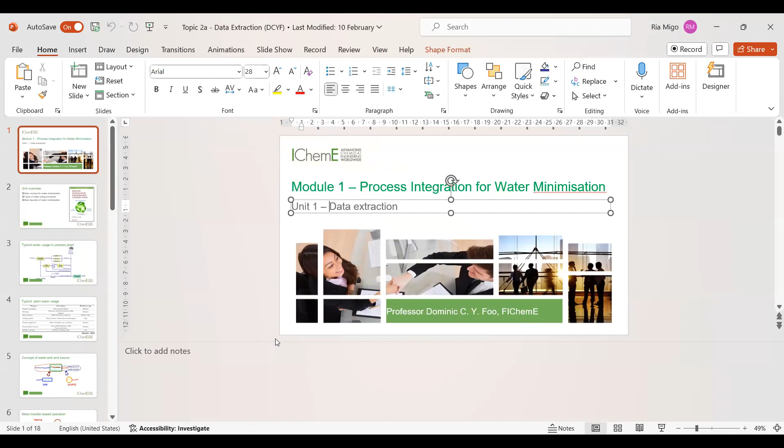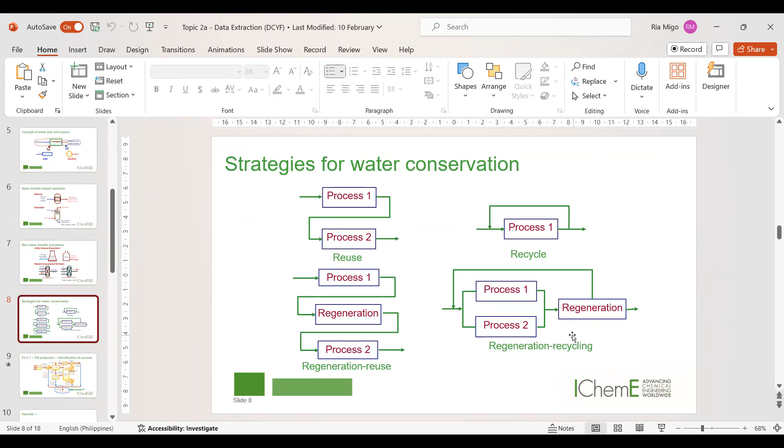Okay. So last week, basically, after the introduction, we discussed the main concept of water minimization, the types of water using processes, main heuristics for water minimization. And we had an example. So by the way, these are strategies for water conservation, di ba? We have two, the reuse and recycle, or regeneration with reuse and regeneration recycle.

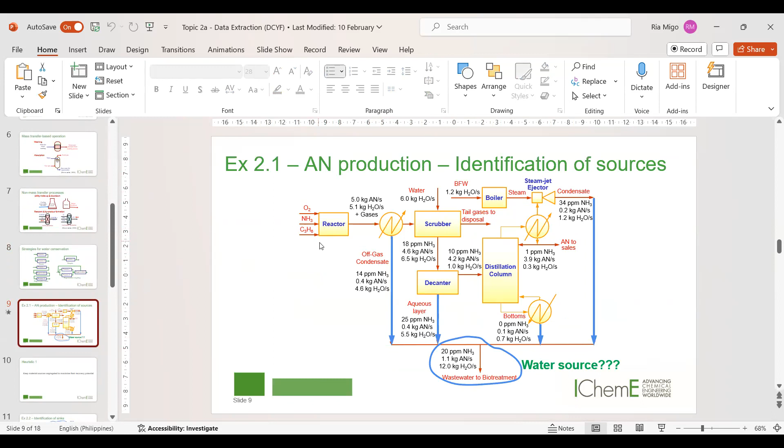And then for this example, we identified the water sources and the water sinks. So remember, ano yung water sources natin? So these vertical lines here. Then the water sinks, the operations that require water, which are the scrubber and the boiler. The water sources discharge wastewater.

So for heuristic 1, remember, heuristic 1 is to keep material sources segregated to maximize their recovery potential. Because some of the sources actually have low impurities. Like, for example, this bottom source, it has 0 ppm. And also, for example, this off-gas condensate has 14 ppm.

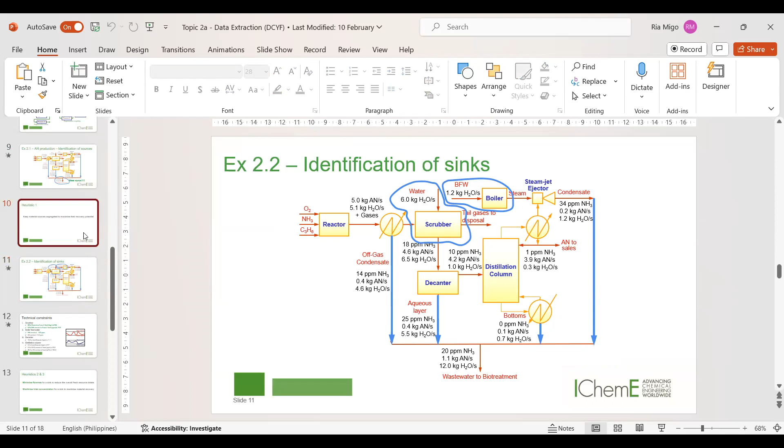But when we mix the sources together, of course, the impurities from the other sources increase the total impurity of the mixture. Yeah. So for heuristic 1, we should segregate the sources to maximize their potential, since we have sources that have lower impurities. Okay, next.

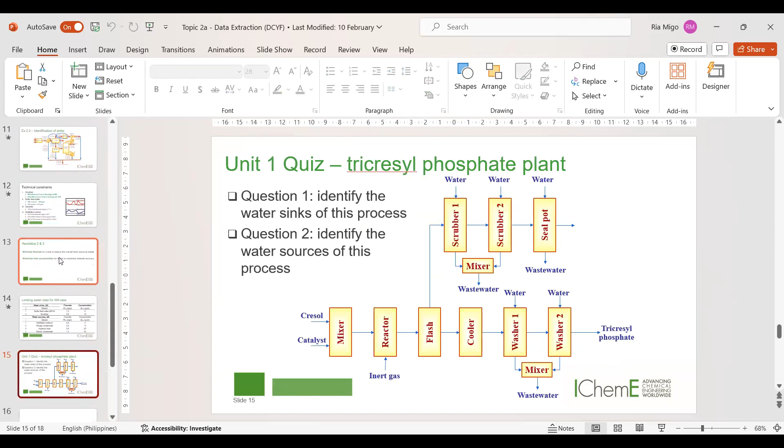Okay, for heuristics 2 and 3, minimize flow rate for a sink to reduce the overall freshwater resource intake. Like for this one, for the scrubber, the flow rate operates between 5.8 to 6.2. So if we operate more than 6.2 kilograms per second, flooding may occur. But instead of operating in the middle, we just choose the smallest, or the minimum flow rate, which is 5.8, to reduce the overall fresh resource intake.

And then the third heuristic is to maximize inlet concentration for a sink to maximize material recovery. Wait lang. Yeah, for a sink, so pareho. So this one, the concentration varies between 0 to 10 ppm. Balikan natin tong slide. For the scrubber, ayan. So 0 to 10 ppm, we choose 10 ppm to maximize the recovery of water.

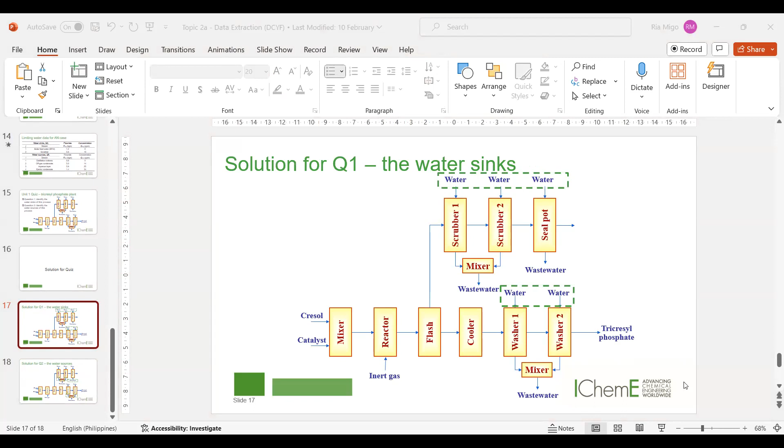Then we had an exercise wherein you identified the water sinks and the water sources. So, not correct mo yung exercise na to last week. So, today, we will go to topic 2B. Hold on, I'll open topic 2B. Okay, can you see the slide now? Unit 2, graphical targeting technique for direct reuse and recycle.

Yes. Okay. Hold on lang, wait. Yes po. Okay. So today we will proceed with graphical targeting technique for direct reuse and recycle. So nagre-record na, 'di ba? Opo. Okay, so

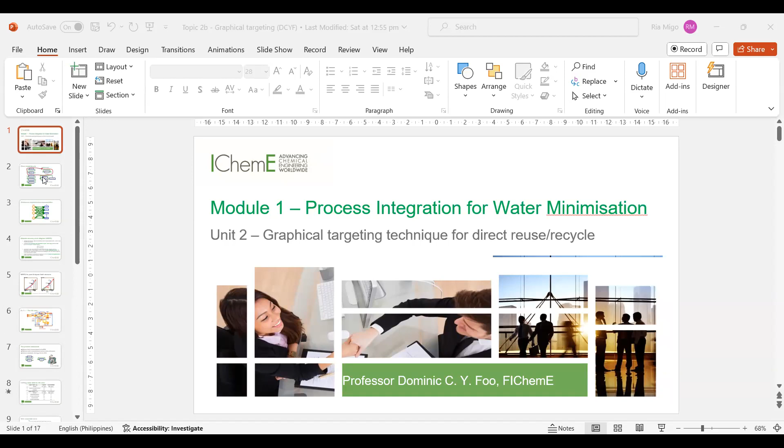when we talk about direct reuse, it means waste from one process is used again in another process. Like what we discussed last time, 'di ba? So waste from process 1 is being reused in process 2. That's reuse. And then for recycle, the waste is rechanneled back to the same process again. And for our discussion, we will focus on these two types of strategies, the direct reuse and

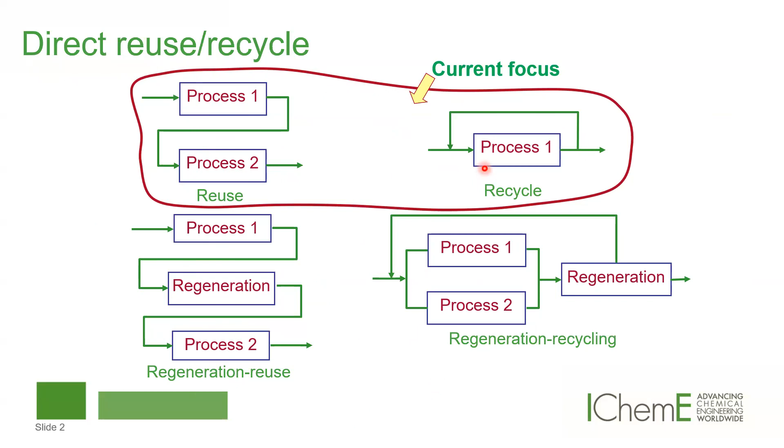recycle. So direct means, unlike this one, there's no regeneration step. This is not the focus of our discussion. So we'll just focus on direct reuse and recycle. Now, we can represent the direct reuse and recycle in a source and sink structure as shown in the figure.

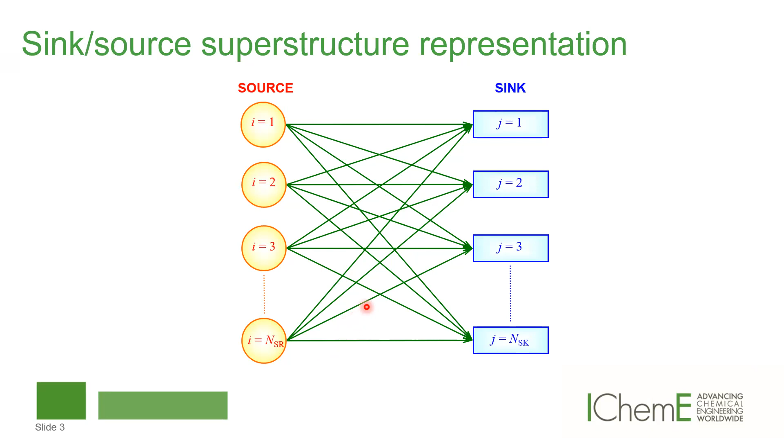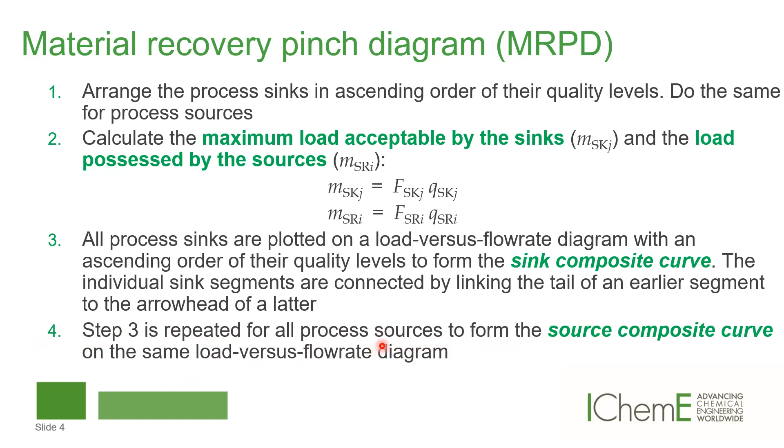So, can you imagine? Here we have a source that has no impurity, but here, we don't have a choice. So for the diagram on the right, we don't have a choice because our fresh, quote-unquote, source is impure. Our freshwater source has impurity. Okay, so this is the sink composite curve, and this is the source composite curve.

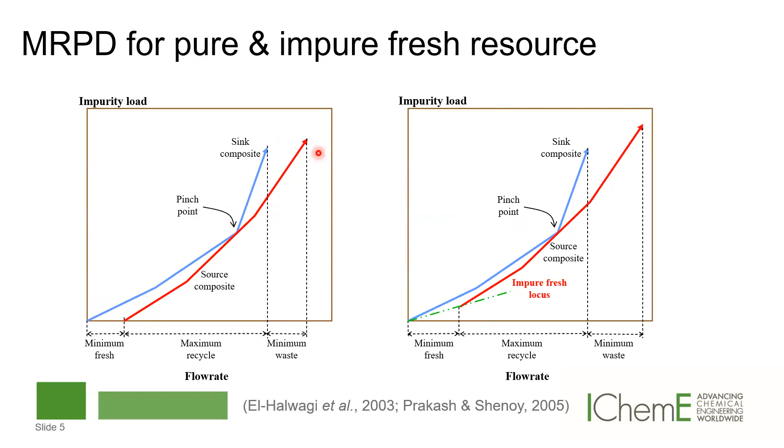So our aim is to identify the minimum freshwater source. Okay, minimum freshwater source. And to identify, okay, so the problem statement: minimum freshwater source for the resource conservation network, and to identify the maximum water recovery between the water sinks and sources to help us minimize the waste. So, the discharge from the system will be utilized for the reuse and recycle of the two sinks for water recovery. Reuse and recycle.

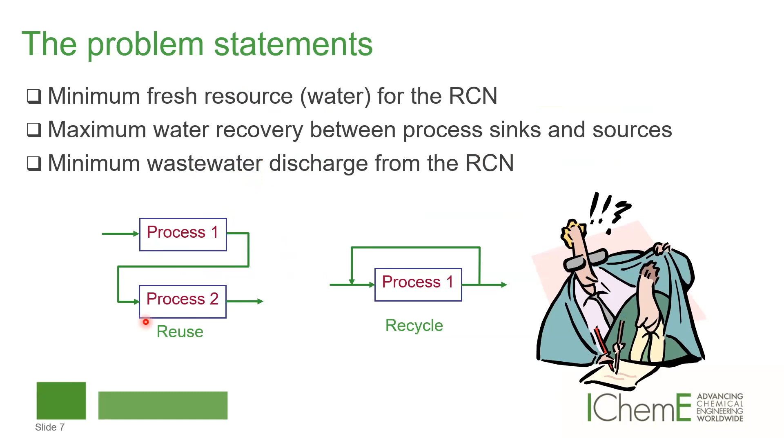Okay, let's proceed with constructing the sink composite curve. Remember, these are the sinks. We just labeled them. This is SK sub J. And this one, SK1, refers to the boiler feed water. SK2 refers to the scrubber. Earlier in the formula we used Q, but we can also use C for the concentration. And this is the flow rate. So mainly we just use this table from our data. SK1 is the boiler feed water, SK2 is the scrubber.

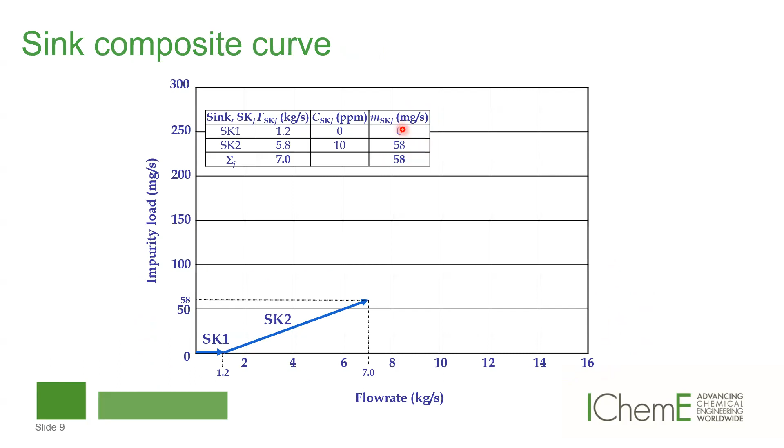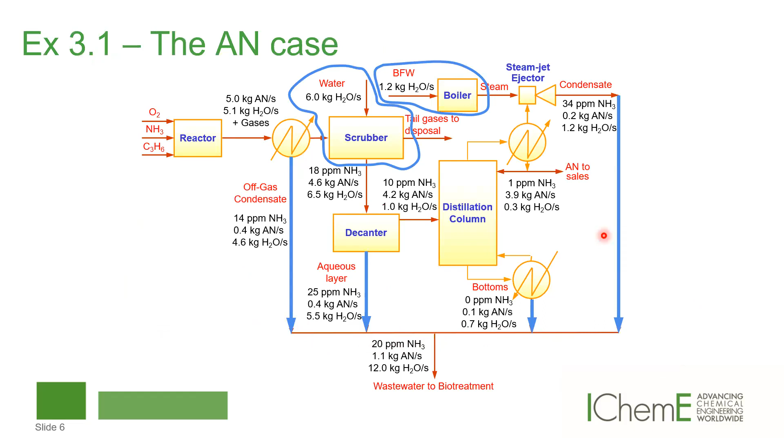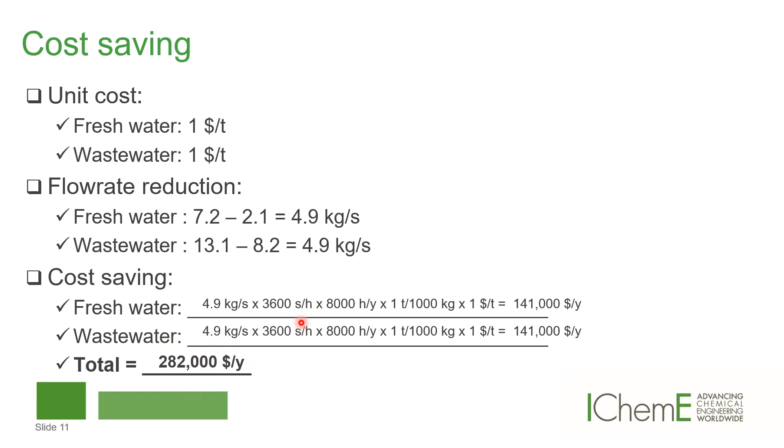So when we add those two savings, yan yung total. And this is a very significant value. On a daily basis, it might not amount to much, but when we're talking about yearly or even decades of saving, this is significant. So if we feel this is beneficial, we can move forward to the next stage of planning, which is the designing of the water networks. That's our second topic later.

But before that, let's discuss the significance of the pinch point. So remember, at first we started with both the sink curve and the source curve, both originating from the origin. However, we push the source curve to the right so that it barely touches the sink curve. And there's a region wherein our sources are below the sink. So we can divide the diagram into two regions, the higher quality region and the lower quality region.

For the higher quality region, the water streams are lower than the pinch. So here we fit in the minimum fresh water required, and in this region we do not generate wastewater. How about the low quality region? It will not require any fresh water. So here we will generate wastewater. Okay. So that ends our discussion for the topic on graphical targeting technique for direct reuse and recycle.

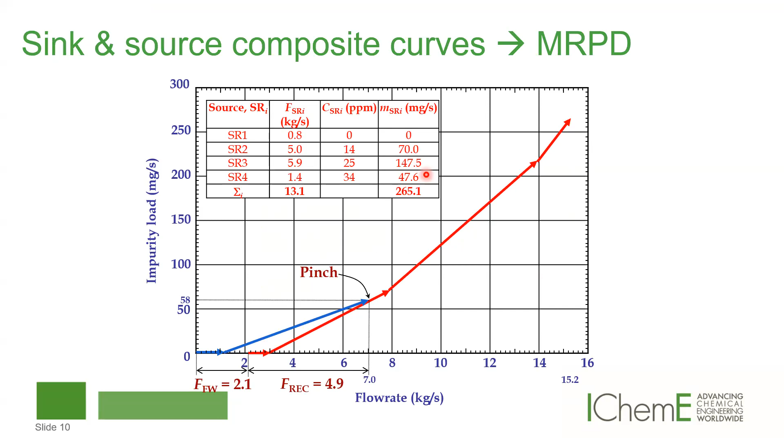But here, as you will notice, this part right here is still below the sink. So we can still utilize this source. Kaya sinabi na minimum waste discharge, ito lang talaga yung waste natin, mapupunta sa waste. But the region right here is still the lower quality region. Oh, okay. Very good question. So may question ka pa?

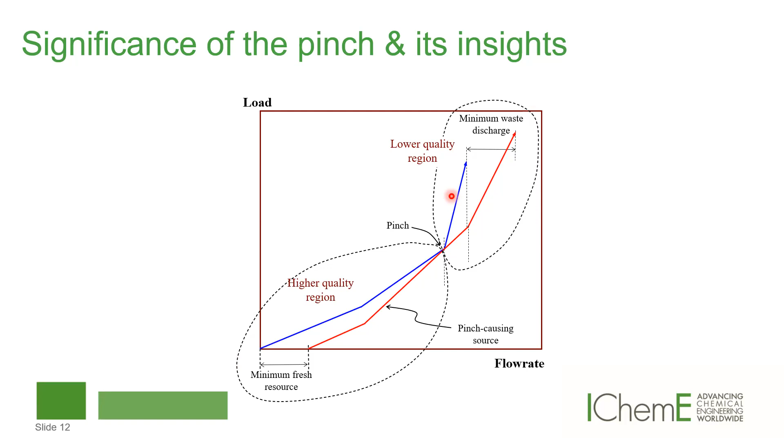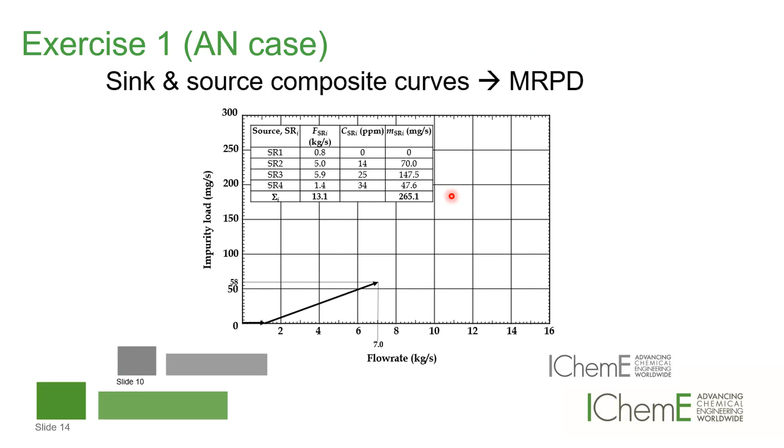Okay? So our next activity, naisip ko assignment na lang siya. I sent you the worksheets. So you can do the same thing that we did today. That's for exercise 1. And then we have another exercise. You can do this on your own, and then submit it. Isip ko, next week na lang yung submission. I will send you the recording so you can follow the procedure. But for this one, it's a new exercise. Let's discuss the answer next meeting.

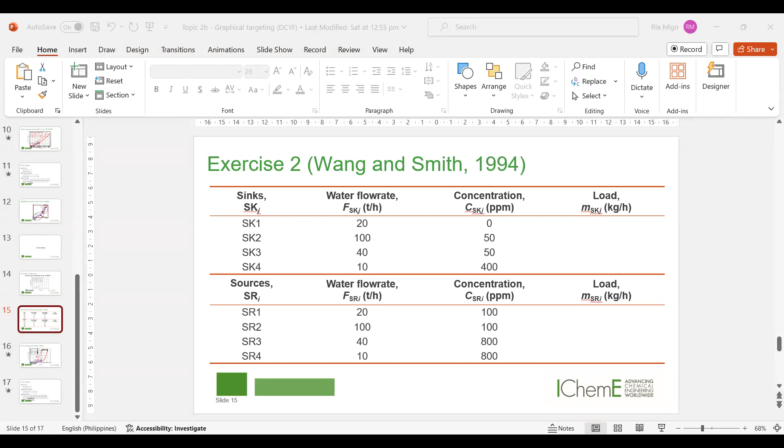And then, try to calculate yung cost saving for exercise 2. I will send you the assumption. Let's use the same assumption: fresh water, $1 per ton, wastewater, $1 per ton, and 8,000 operating hours per year. So, let's see if you will get the cost saving.

Okay? So, pause muna tayo. Let's take a 10-minute break. We'll resume at 2 o'clock for the next topic. Okay? Okay po. Sige, see you.

Okay, so let's proceed to Unit 3 of Module 1, or in our syllabus, Topic 2C, which is on the network design technique. In process integration, there are two main steps: targeting, or the predicting stage, and design. So we already did the targeting in the previous lessons. Remember, we started with the process flow diagram, which you will obtain from the company or from the industry. And then after that, you will do some data extraction. And finally, for the last step of targeting, you can do the graphical targeting technique, like the previous lesson, wherein we graph the sink and source composite curves. Or you may also do some algebraic method, but we will discuss that later.

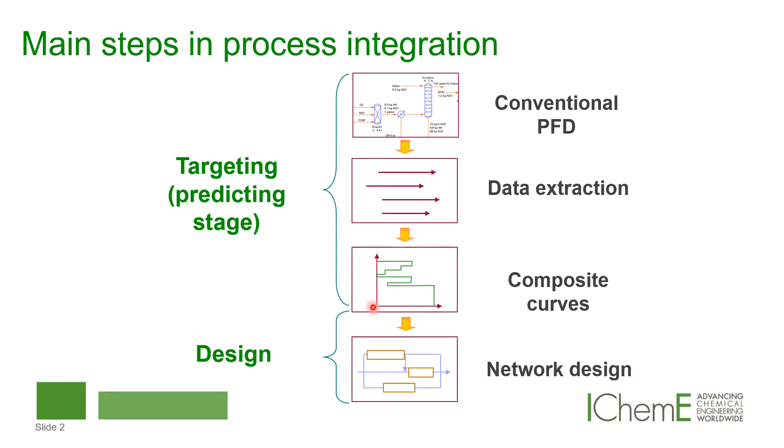So I will introduce to you the systematic method called the nearest neighbor algorithm. It has 5 steps, and by following the 5 steps, we will design the water network to achieve the maximum water recovery targets. In step 1, we will arrange all the sinks and sources, including the fresh water resource and intercepted sources, in descending order of quality levels, respectively. So it means we start the design from the sink of highest quality.

That means we'll start from the lowest concentration to the highest concentration. So for step 2, we'll match the sink and the sources of the same quality level if there are any found. So at the same level, we can match the sink and source directly. If we don't find a source of the same concentration level, that's okay because we can mix two sources to fulfill the flow rates and the quality requirement of the sink.

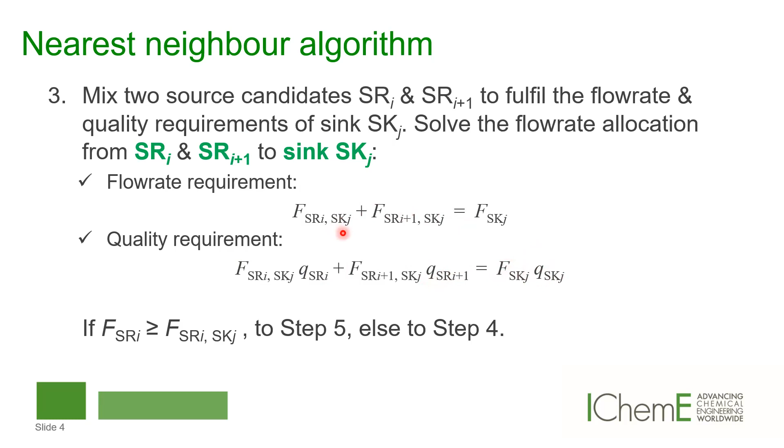So we plug in into the two equations. Hindi ko na ipapakita pero we plug in these two equations to know yung F. So, given to, concentration of the freshwater, 0. Concentration of source 1, 50. And then, ito yung sa sink, 20, at saka yung flow rate. Two equations, two unknowns yun, to know itong flow rates na yan. Okay, gets mo? Opo. So, you just use the two equations.

So, after using the two equations, we get that for fresh water, ito yung requirement niya, 30. And this one, 20, to achieve yung 20 ppm. Okay? Yes po. So, it tallies because 20 plus 30 is 50 tons per hour. Then, it will also achieve yung 20 ppm requirement if you check sa equation. Okay? Next. Okay na yung sink 1.

Our next sink is sink 2. So by the way, our remaining fresh water would now be 70 minus 30. So 40 na lang yung natitira nating fresh water. Okay, so let's proceed with sink 2.

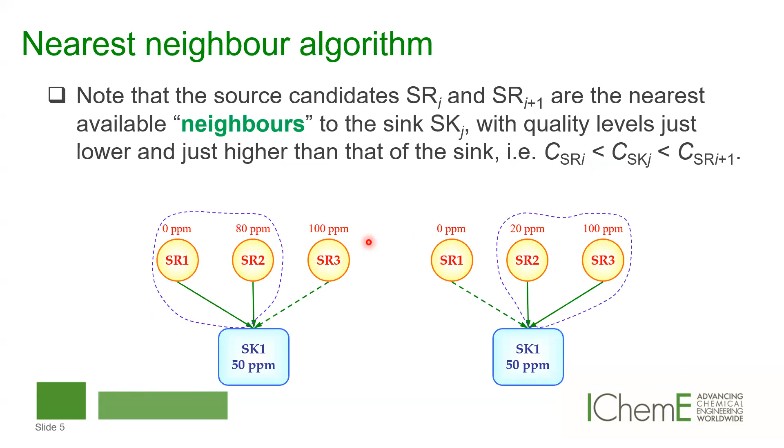Ayan, number 2, 'di ba? So meron bang kapareho? Yung source 1. Yeah, so very good. Source 1. And so by the way, ilan na lang yung remaining ng source 1? 30 na lang po. 30 tons per hour. So, very good. We'll use up the 30 tons per hour. We'll use up completely kasi kapareho na siya eh, 50 ppm. So, what about the remaining 70 ton per hour requirement of sink 2?

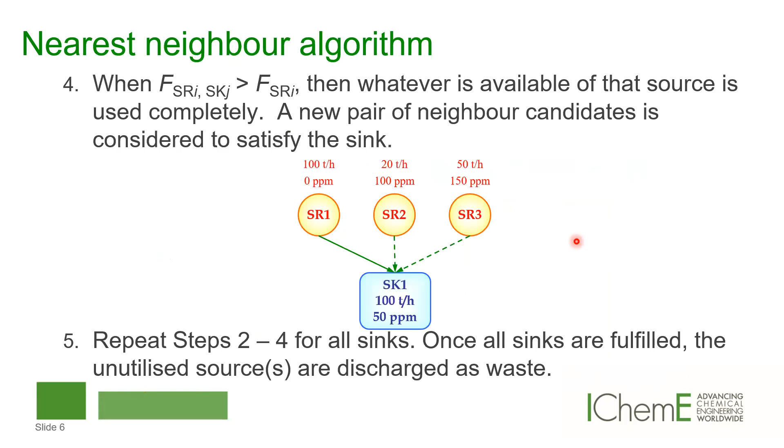Unutilized sources are discharged as waste. Tingnan natin. Ano yung unutilized sources? So, dito, may 25 pa. And then dito, may 25 din. So, merong waste. Nag-match kaya with our material recovery pinch diagram? So, remember, ito yung from material recovery diagram, this is the wastewater. So, nag-match siya. Galing, no? So, meron tayong fresh water and then wastewater na 50.